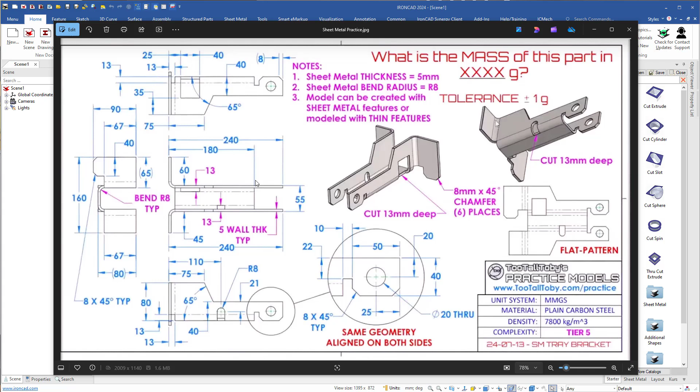So I will begin with this bottom plate here. I will move this image to my second screen. I drag the sheet metal group, drop it here. And we will begin with a stock. Double click. Go down here to select 5 millimeters. This one. Click OK.

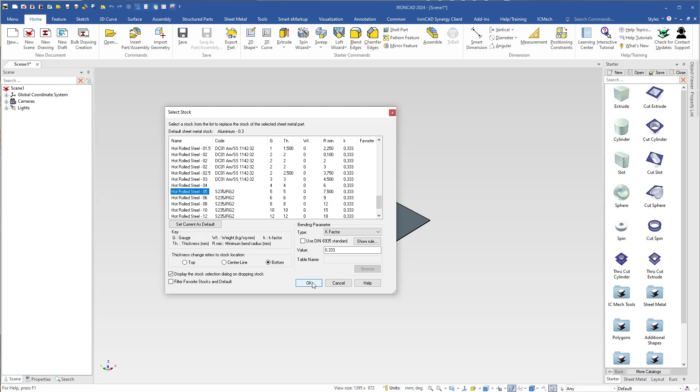And then I select it. In part level, right click, go to part properties. We come to sheet metal group here. I will change the bend radius to 8 and hit enter.

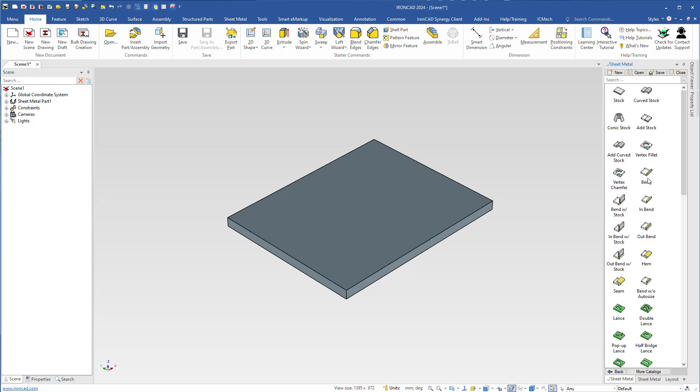Now I can double click the sheet metal group to come into the catalog, and I will add a bend, drop it here, and I will also add a bend on the other side.

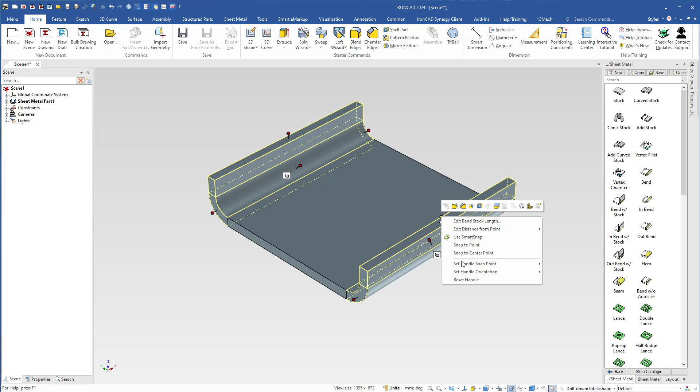So now when this one is selected, I shift select the other one. Right click this handle, see now, like so, right click and edit distance from the bottom. It should be 80, like so.

Then I can continue with the bend and drop it on this one, this side here, to add a flange, and do the same on the other side.

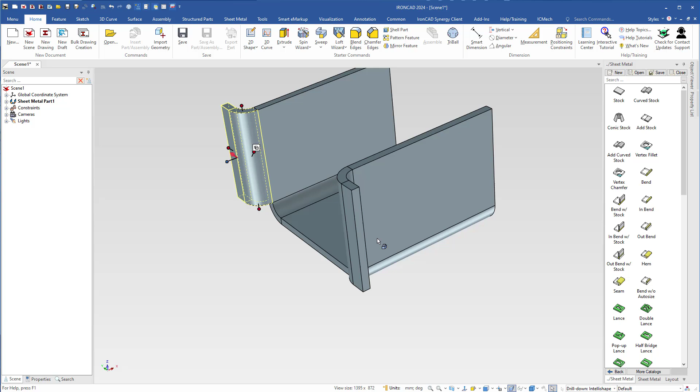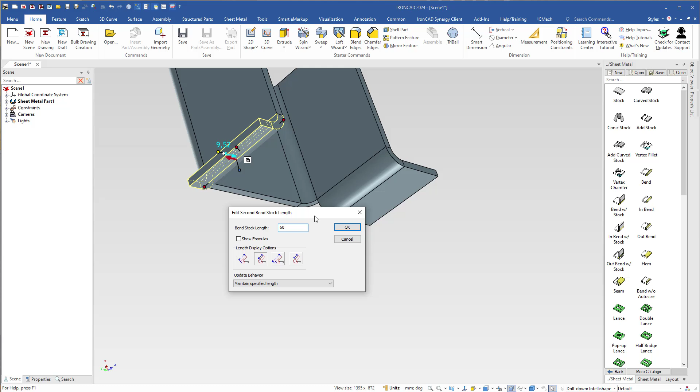Like so. Select this one, right click the handle, edit distance from this side, that's 45. On this side I can select it, but double click this handle, and I'm presented with this menu. Here I can choose inside sharp, and this one here, this one should be 60. So inside sharp is the distance from this side to that side. So I'll click OK.

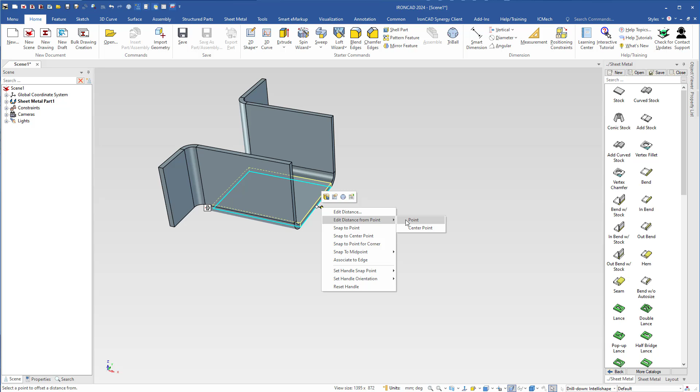Now I can extend this bottom plate. Should be 180 from the front. So I would right click here, edit distance from this side, 180, and then I will change the width.

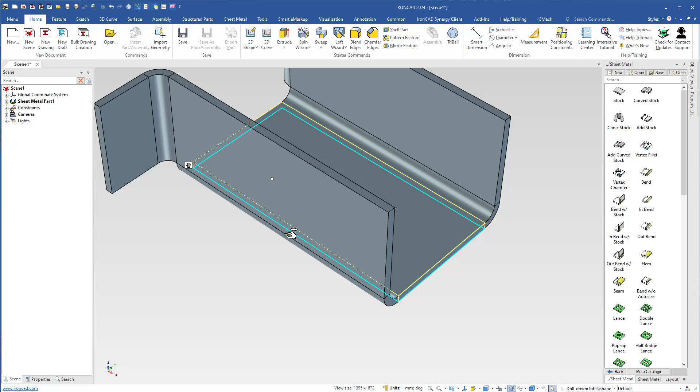When this one is selected in IntelliShape level, I right click this handle and I will change the snap point to this side. So when I hover the cursor over this shape handle, we see a white dot. That's the snap point. And then I right click and choose edit distance from this side, and that should be 55, like so.

Then I have to remove some material. I will use a cut extrude to remove this. We see that the distance from the front to that edge is 75, is 40 from the bottom.

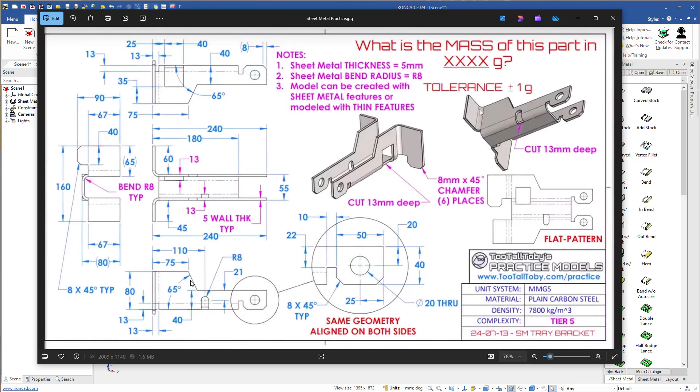So I will go back to the starter catalog, drag a cut extrude, drop it here. It will go through the part and also snap to the top and to the back.

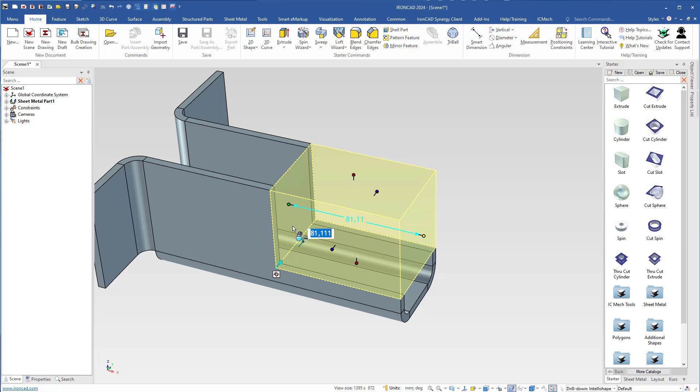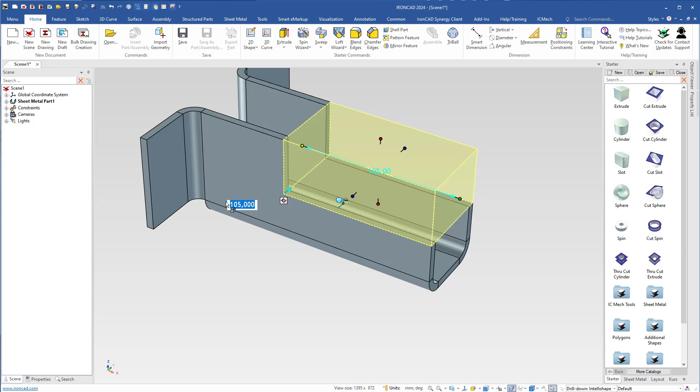And right click here, edit distance from the bottom, that's 40, and the distance from the front here should be let's see now, here should be 75, and I have to change the angle here from 90 to 65.

So I right click here inside the IntelliShape, go to edit cross section, and grab this point, drag it along the y-axis like so.

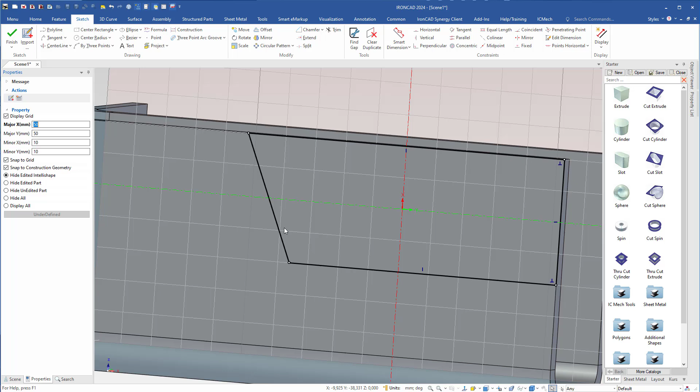Now I can select this line on this side of the midpoint so that we have the arrow for the angle dimension on this side here, so that we will rotate this line around this point. But I will drag the arrow to the y-axis.

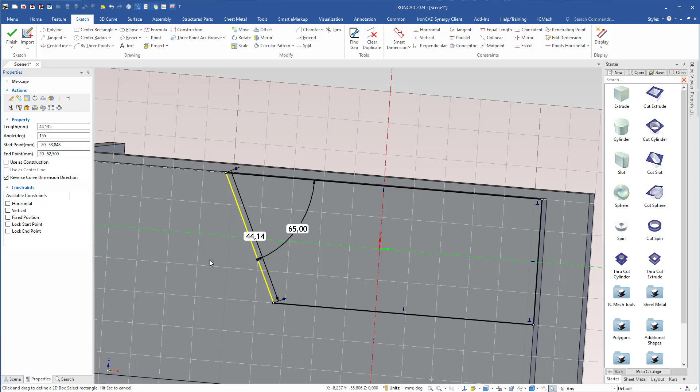So now I can select the dimension and type 65 here. And then deselect, right click and go to finish drawing like so.

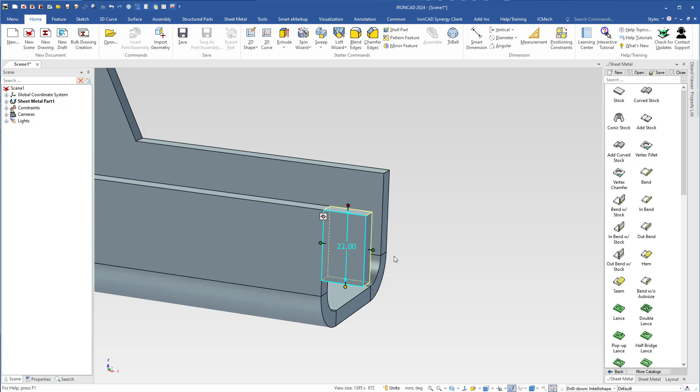Then I will extend this part, go back to sheet metal, add a stock up here, drag and add this stock here, and then press tab to use the size box handles. The thickness of this one should be 22. The total length here is 60. Now I can add another stock on this side here.

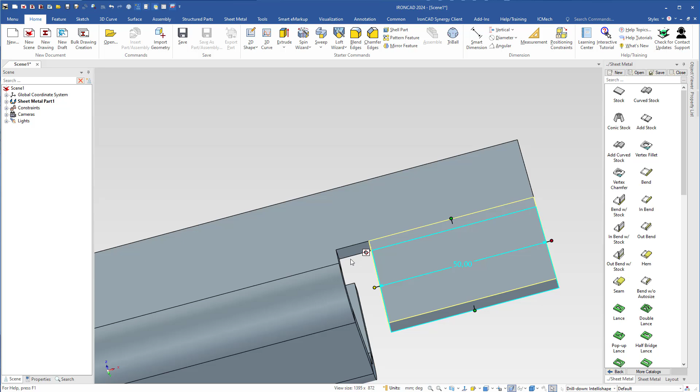Press tab to use the size box handles. Click here. This piece should be 50, so we are left with a gap of 10 millimeters. And I will also snap this handle to the bottom.

Now I can add chamfer here. Come up here, select chamfer edges like so, 8 millimeters. Same here on this side.

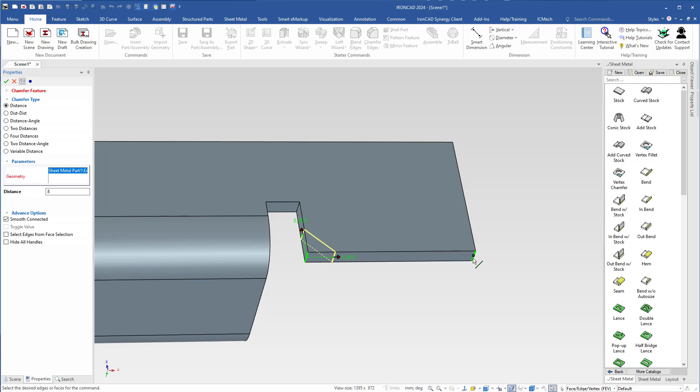Hit enter. Then I have to cut a hole here, so I come down here to the bottom, select the custom profile, drop it here, press tab to use the size box handles, change that to 20 and use the tri-ball to place it in the right position.

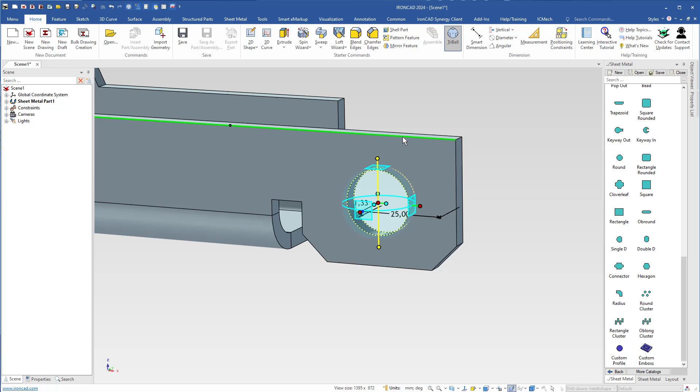So I right click here, edit distance from this side 25, select that axis, right click, edit distance from the top, and that's 20, like so. So now we need another one on this side, and I will copy that one, or mirror.

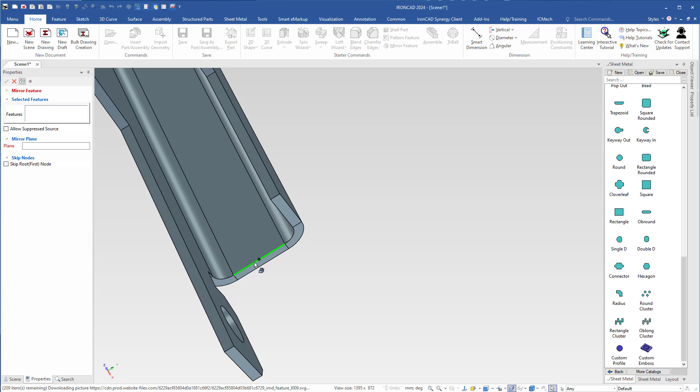Use mirror feature. First I will select the part, second select the mirror plane, and that will be this edge. Select the midpoint, and then I have to select features, this one, that one, the hole, and also the chamfer, like so. Click OK.

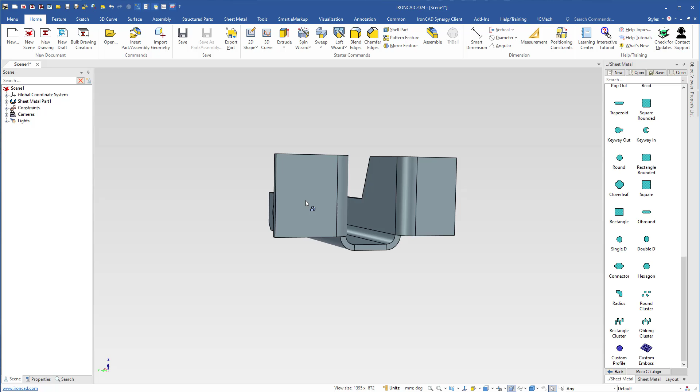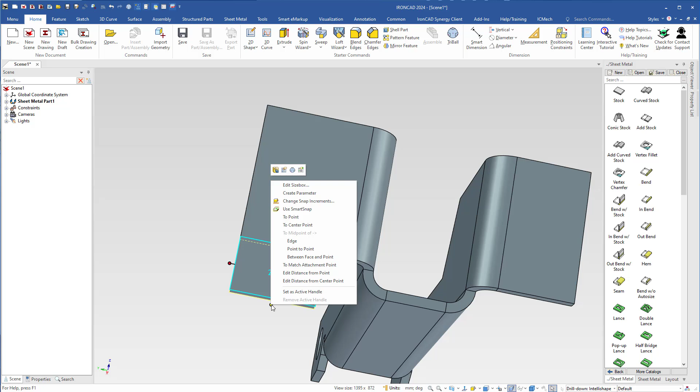Then I come back here to the front. I will add a stock down here, drop it here, press tab to use the size box handle, select that handle. The width here should be 40, and the distance from the top, right click, edit distance from this side, 90.

And now I will chamfer the edges down here like so, and hit enter.

And next step is to cut this material on this side and then on the other side. We have that one here, the dimensions. So this one is, we see that's radius 8, that means the width is 16, it's 21 from the top to the center, and it's 110 from the front.

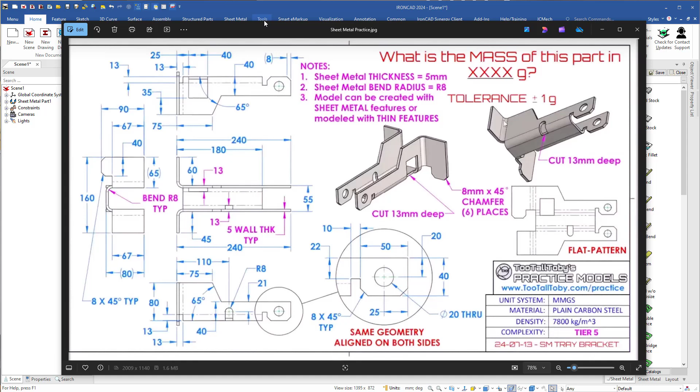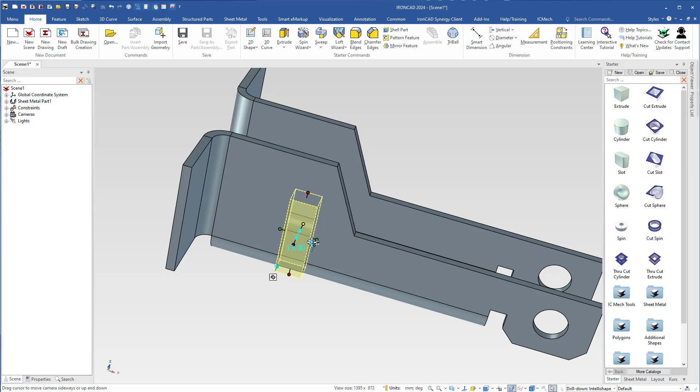So I will grab a cut extrude, drop it here, and the width is 16, the cut depth is 13. Then I will use the tri-ball, move the tri-ball to this point here, and the distance from the front is 110,

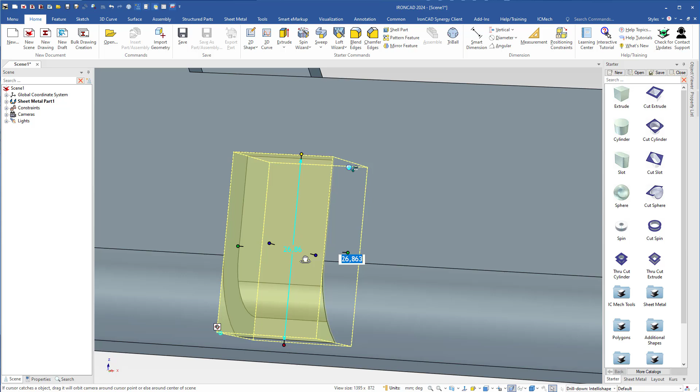like so, and I will move that one down a bit. Here I can use blend to round these edges. It should be 8, like so,

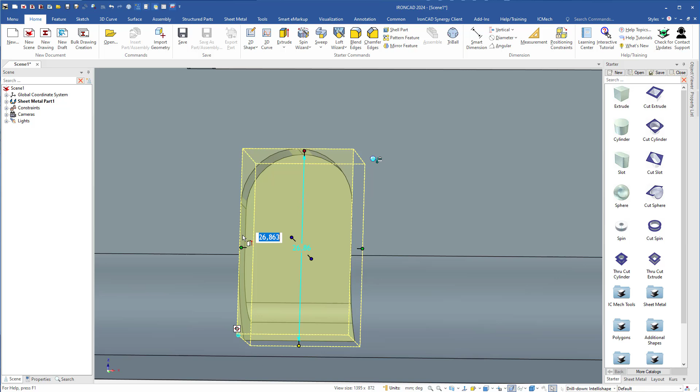and then I will select the IntelliShape here, press and hold Alt and left click, you select the IntelliShape. Then I will move this part so the center of this hole will be 21 from the top.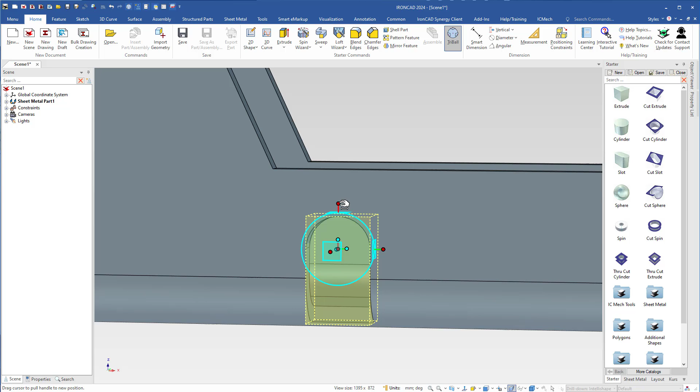We'll move the tri-ball to the center point of the chamfer or the blend. Then right click, add a distance from the top, that's 21. Like so, and then this one will snap to the bottom.

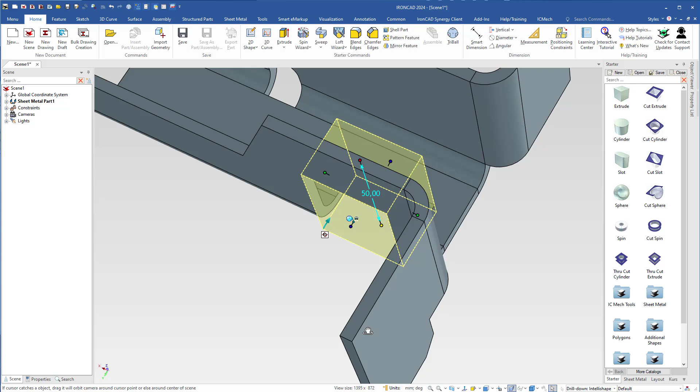Then I go around to the other side, use a cut extrude again, drop it here. The cut depth is 13. The distance from this side here, this edge to the front, is 25. Like so. The width of the hole is 40.

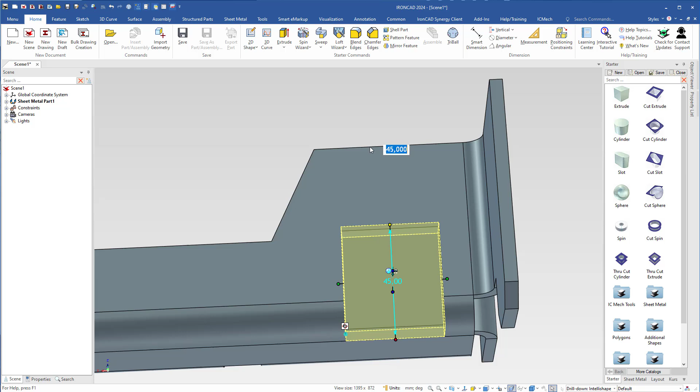Snap to the bottom. And the distance from this side here to the top is 45. Like so. So now I think it's finished.

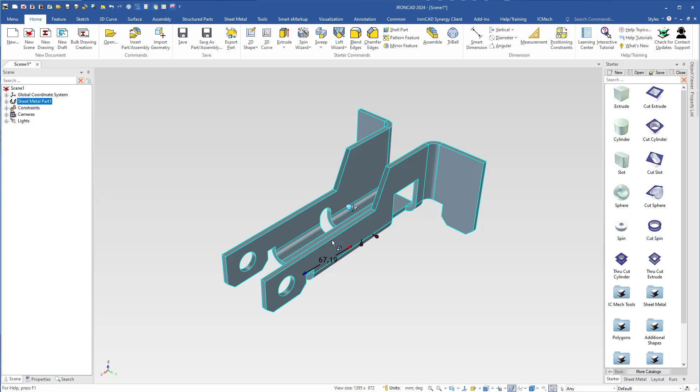And to unfold this bracket now, you select it, you can right click, you have unfold up here, you have also unfold here on the menu, but you can also use a shortcut, select a part, press U on the keyboard to unfold. It will look like this.

Select the part again, use Shift U to fold it, like so. So this is how we can create this sheet metal part, the tray bracket in Ironcad.